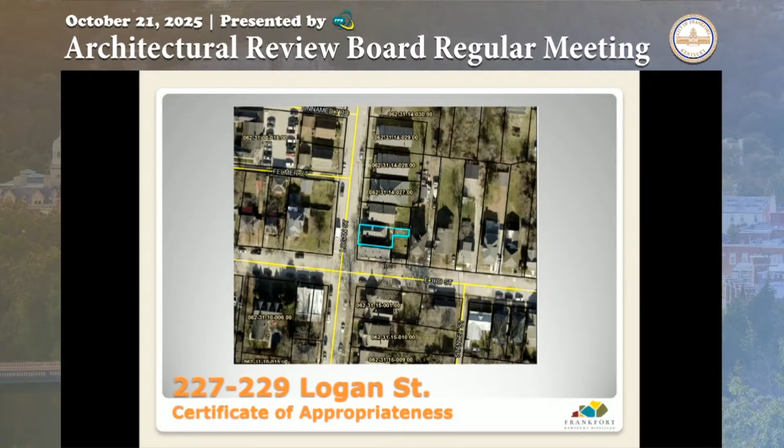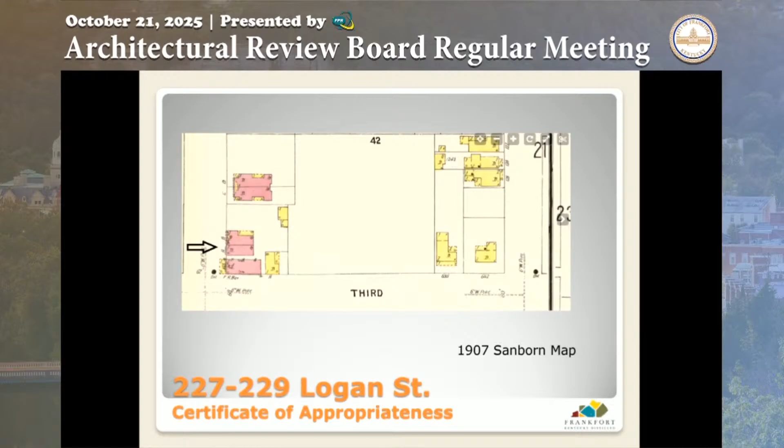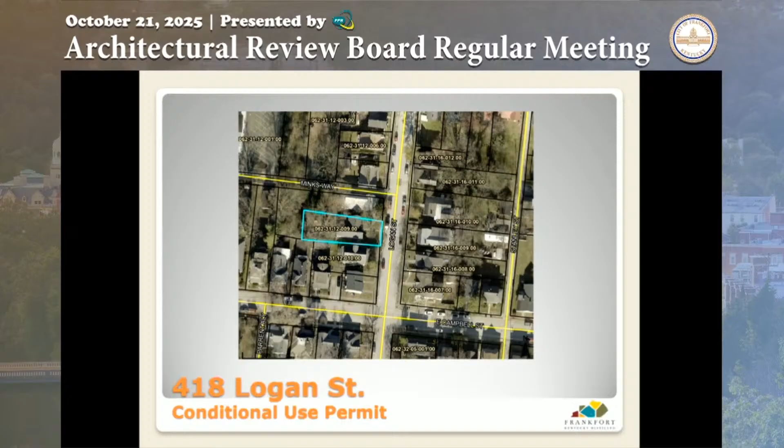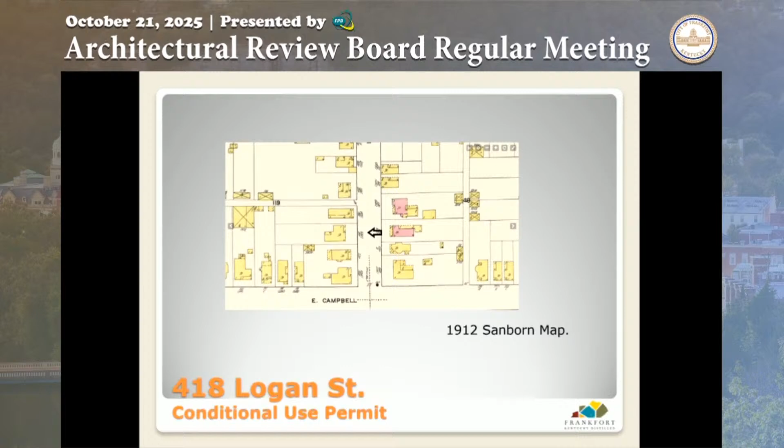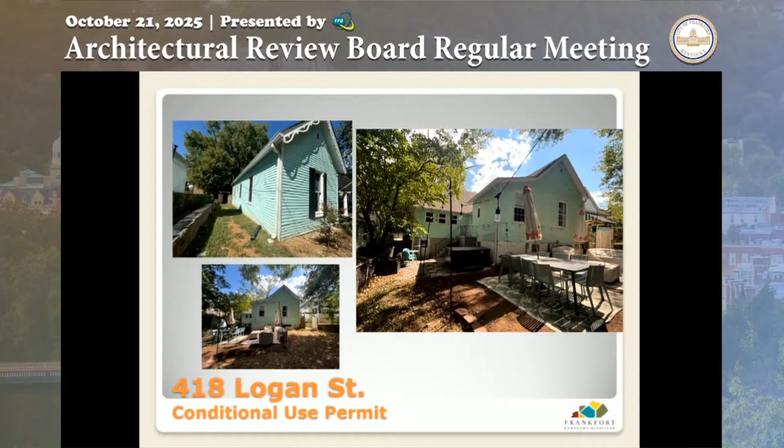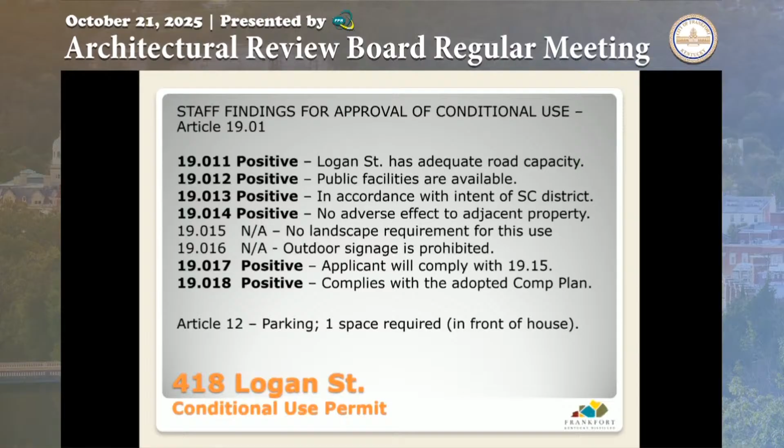In Article 19, all of the general conditions for a conditional use permit have positive findings. The parking requirement is met with the one space in front of the house. I've also included a map. The subject property is the star in about the center, and the circles are the other non-owner occupied short-term rentals in the vicinity.

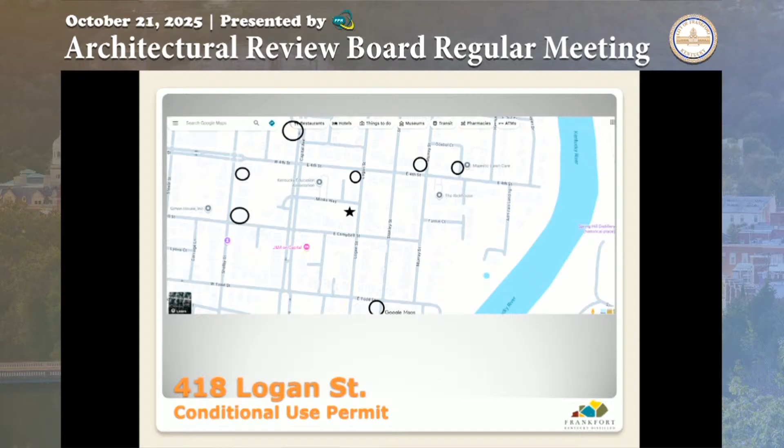Based on the information contained in the application and our evaluation, we find the request in compliance with the zoning regulations. The request is also compatible with the Franklin County Comprehensive Plan, and we recommend approval in accordance with the findings on page 4 and 5, and with the recommended conditions here and also on page 5 of the staff report.

Are there questions for Vicki? Doesn't appear to be. Thank you, Vicki.

Is the applicant present? A representative for the applicant? All right, no applicant present, but we still proceed? Yes, you may. Do we need to have any discussion, or is everybody ready to move to vote?

I think we should check and see if anyone else is here that may speak. Oh, that's good, thank you. Anyone else here to speak on this proposal? There being none. Any discussion amongst the board?

All right, with that, I'll entertain a motion. I will try this time, since Patty was the trailblazer a while ago.

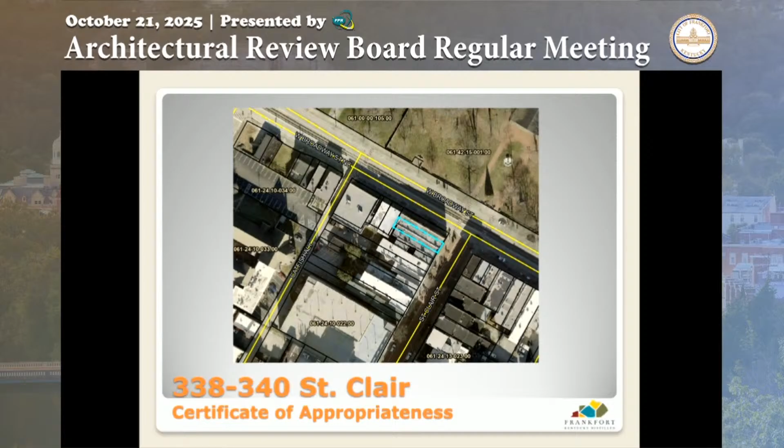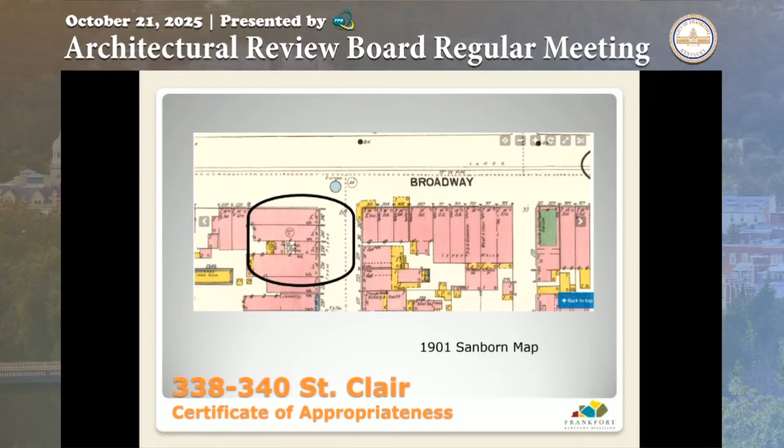Here's a PVA map. That little blue rectangle there doesn't really cover both sections of the building, so it looks a little small, but it's actually two sections we're talking about. Here's a better view on the 1901 Sanborn map of the building in its entirety, and you'll note there's a notation that says it's drawn on this map from plans, indicating it was probably under construction or built shortly after this map was published in 1901.

Couple older photos. The top left photo shows the building when it was Gershman's department store. That photo is from 1979. It was taken as part of the National Register nomination for the Frankfort Commercial Historic District.

The building hasn't changed a whole lot since then, but you can see the ghost sign is much more legible. And then the bottom right image is actually a photo I took with my camera of a photocopy, so it's not very good, and I apologize for that.

But Leo Oberwarth published kind of an advertisement that was in book form, and it was called To Those Who Contemplate Building, and it was filled with images of all his structures, many of which were in Frankfort. So this is the Ringgold Block in that publication.

You can see that it originally had kind of a ziggurat parapet at the corner that was stepped up, and a lot of chimneys, which are all gone now. But other than that, it's not that much different.

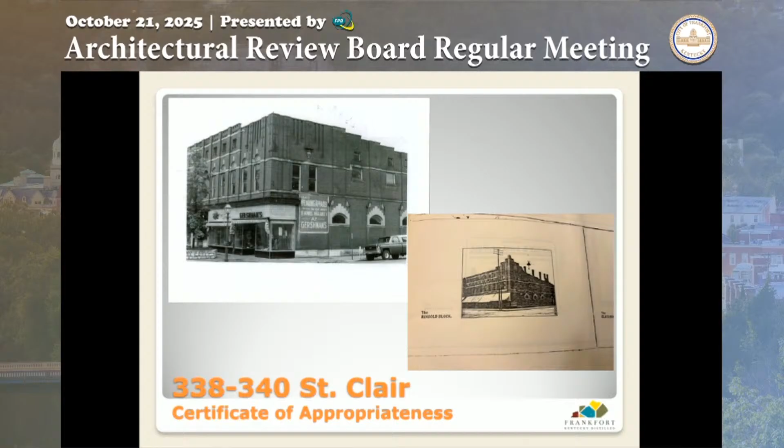Here's a couple of close-ups of the existing storefronts, as well as a view of the second-story windows. The proposal includes the replacement of the existing storefronts, which date to the mid-century, with compatible contemporary designs, and also the replacement of the wood double-hung windows with aluminum-clad units. That does meet the design guidelines for the district. If someone came in with just that on their proposal, it would be administratively approved.

Here's a rendering of the proposed storefronts and window replacements. One of the new storefronts, you can see from looking at the top images, will change the depth of the entry just slightly, and the width as well, but it's mostly a change to the depth.

The existing doors on the storefronts will be replaced with custom doors to match.

Here's a view of the north side of the building, which faces Broadway. The aluminum-clad windows are also planned for this side. The small square window openings on the second floor, well, they're actually more rectangular. They're fixed, and they don't meet the building code for egress. So the proposal is to enlarge those openings so that they can put matching double-hung windows there.

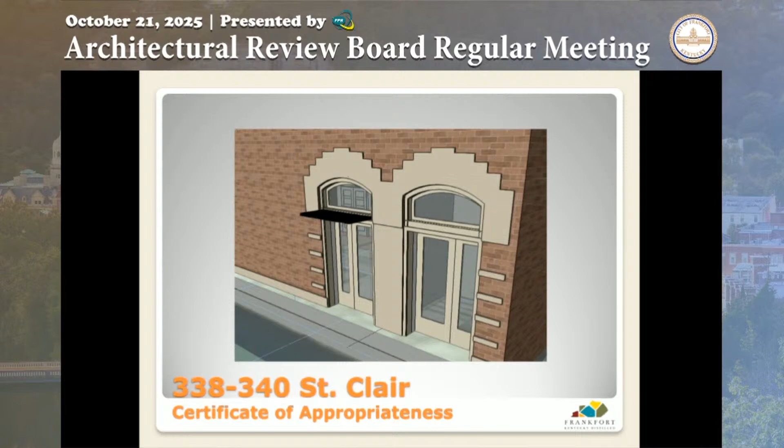There's also a blade sign that is being planned for the corner. The design for the lettering and lighting has not been fleshed out yet, but the dimensions are rendered, so you can see how the size of the sign and how far it projects looks relative to the building as it is rendered in the drawings.

The size of this proposed sign is 19.3 square feet. That is well within the dimensions allowed based on the size of the storefronts, as written in the zoning regulation for signage. So all of the relevant regulations pertinent to signage in Article 4.248 have positive findings.

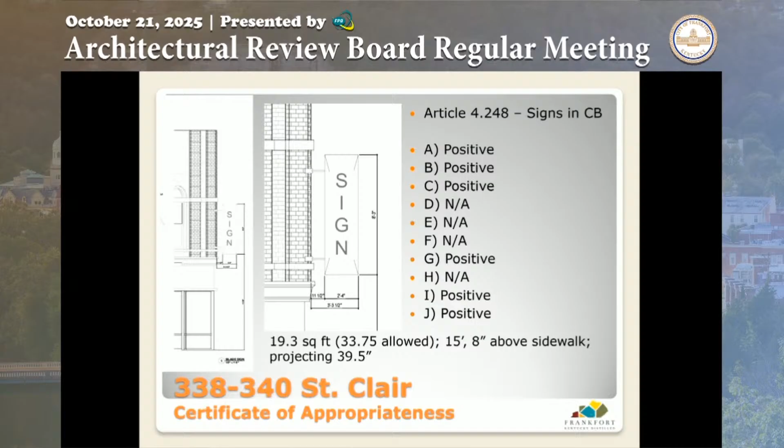Are there questions for Vicki?

Just want to make sure I understand the door openings on St. Clair. You said one was going to be minimized, like not as large as it currently appears? Did I understand that correctly?

The openings that face St. Clair, is it the one on the left where something is going to change? One of those doors is a wood door, but I don't know if it's the original door. The other opening is not historic, I don't believe, and it may be changing slightly. I don't know, the architect is here tonight and I think she'd be able to answer.

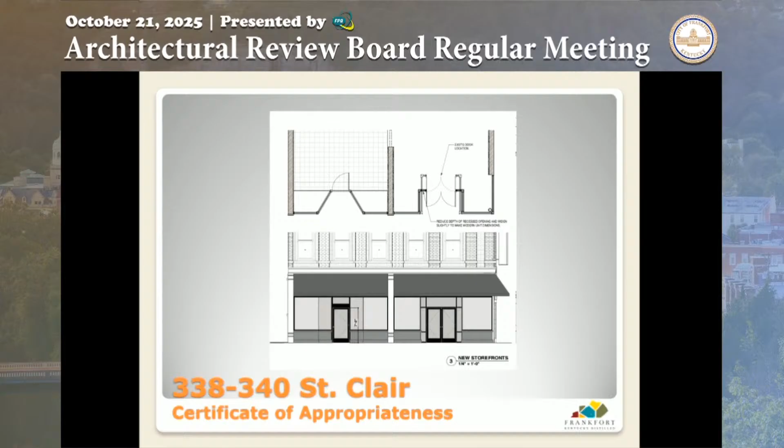Back to the front, if we're facing it like the pictures line up, is that a glass transom with all the little squares above it, on the left? You mean the pictures? Wait, there was a picture like this one.

At 338 St. Clair, which is the left hand of the two storefronts, that was most recently Vibrant Life. That is a historic glass transom, and it will stay, although we're proposing to mount the awnings like they were in that earlier Oberwarth photo, where they mount to the underside of the storefront, so the cornice will show above. Yeah, you'd see it as you're approaching the building.

Okay, and I think I read that you don't think you'll run into that same issue on the right side? We don't know, we haven't cut into it to explore it. It's been covered since before the 1979 National Register photos, it was covered then, and I don't know more.

Any other questions for Vicki? Jen? Oh, I'm Jen, sorry.

We did put in the application about the window replacement with the aluminum clad wood windows. It really has no bearing on your decision. We are exploring the potential for tax credits. There's some interior treatment that may just be prohibitive for that program.

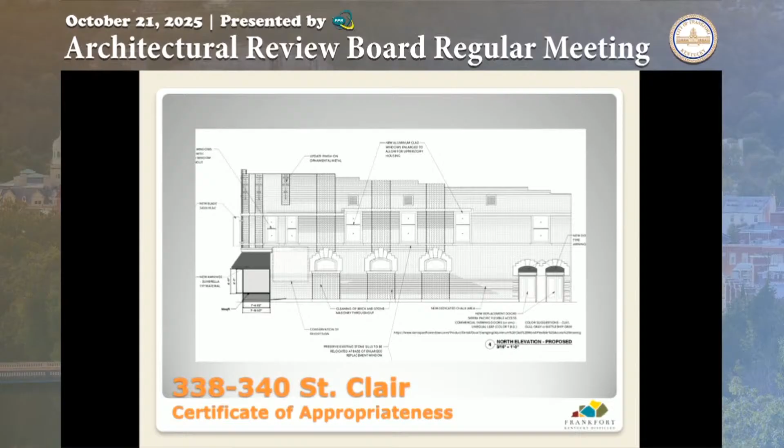Can you show the front a minute again? Yeah, I can do that. You're gonna give me technology. Am I going the right way?

There you go. So with awnings, and then that sign, when somebody says contemporary I'm thinking now, so this front is going to look more like something built today, not necessarily like something of the time period. I wanted to be clear on that, so I understand. Does that make sense? Yeah, I think we understand.

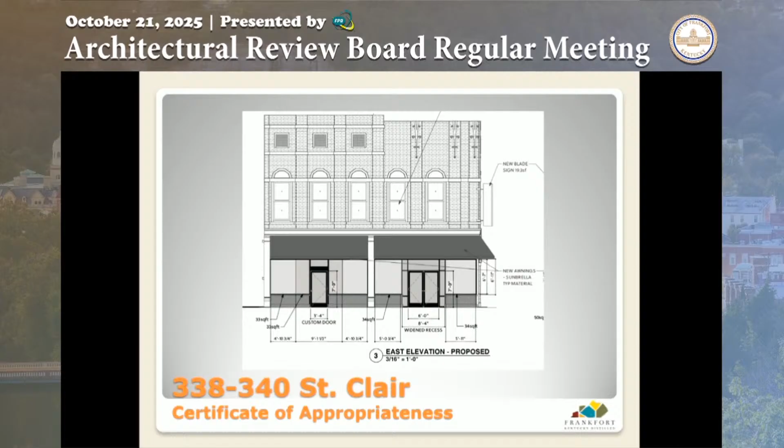In our design guidelines, it does speak to awnings and signage specifically — more about dimensions and materials. The contemporary concept is that they're new, but according to those guidelines. Are we talking about the storefronts or the awnings? Both — the storefronts and the awning. I understand the updating and the constraints on the size of windows and such.

The existing storefronts are not original, except for the transom prism glass on the left — that part is original, and the pilasters, which are cast iron, are also original. But the glass and the bulkheads, the panels at the bottom, are not original. So when you're not removing original fabric, you have a little more leeway generally with regard to replacement.

Guidelines generally focus on when you need to replace something, not necessarily to restore it back, but you can use new materials if they're compatible with the rest of the ensemble. That's what we're doing here — there are several examples downtown where newer storefronts have been incorporated into the historic facade.